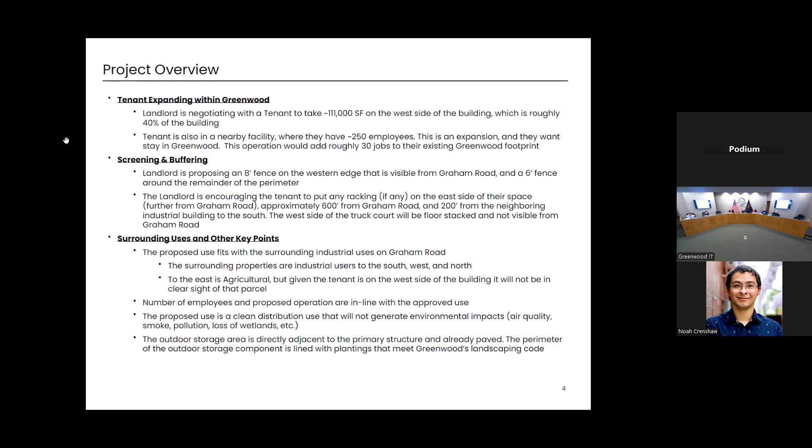And then I think we already talked about the screening and buffering. Any racking they have, we're proposing we'll put on the east side of the truck court, so further from Graham Road, more in the middle of our building. I think it fits with the industrial use along Graham Road.

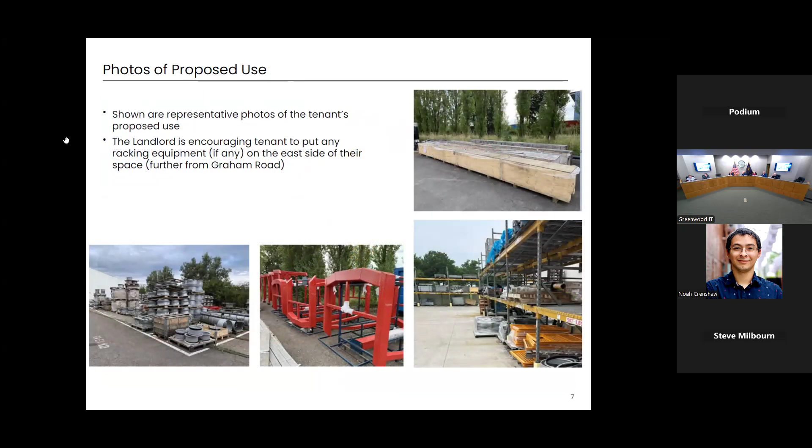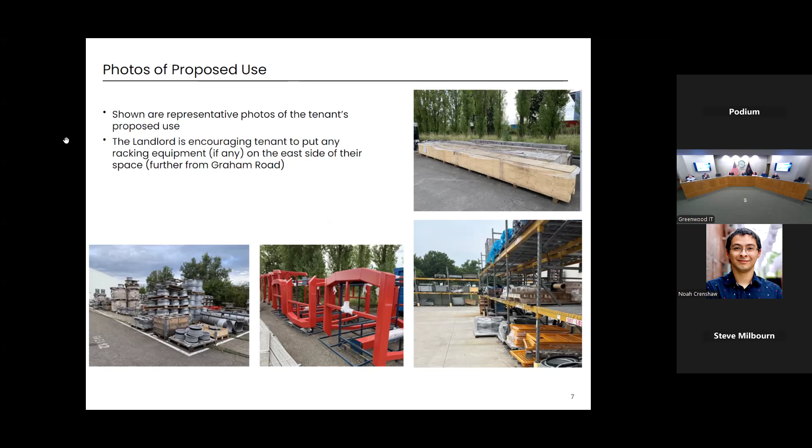Staff does have a few concerns with the proposal. It is not meeting one of our requirements to be located in the rear yard - it is located in the side yard, actually closer to the front of the building. We also questioned the screening material, showing chain link with slats, which would not be permitted for the screening of outdoor storage.

Lastly, I did want to mention - this was not in our staff report, but we do have some concerns. Exhibit B noted that there are designated fire lanes, and there should not be parking in the fire lane, per section 6-91. So if you are to approve this, make sure that is addressed. I think it conflicts with our fire lane access - the fencing they're looking to install, as well as the location and parking of vehicles, may interfere with that. I know it wasn't in our staff report, so I'll let you respond if you're willing, but that was a third concern we had. For those three reasons, we did provide an unfavorable recommendation.

Sure, so the concern is - if you go back to the site plan, one of the first ones. See in the parking lot, those hash marks, those lanes - on the bottom where it says outdoor storage zone? Yeah, those are all three fire lanes, and the outdoor storage goes directly over a fire lane. The Greenwood ordinance precludes any blocking, parking, stopping, or standing of any personal property, or any other means of obstructing fire lanes on private and public property, shall be prohibited at all times. Also ordinance 6-135 for new construction indicates that for commercial property, you can't block fire access in such a manner to obstruct free passage of fire lanes. So the concern is your fencing obstructs that access to those fire lanes.

So are you talking about the hashed area, sort of in the middle? Yeah, see where the parking slots are - in those parking spaces there's a hash mark. And if you look at exhibit E, it identifies those more closely. So could we update this plan to show that we won't store anything in that one specific slotted spot?

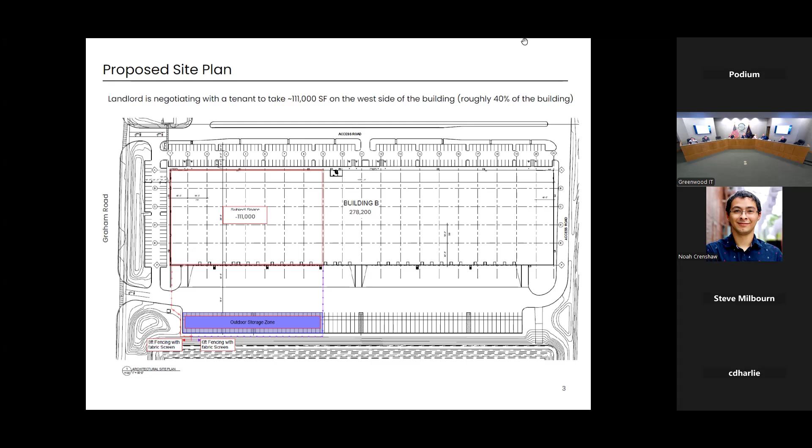I saw a picture of the chain link, so I get the chain link because you don't want to see through it. They had screening to go on top of the chain link that would make it opaque, which I assume is still not what was listed in the code adoptions. It's difficult to see in the photo. I do know chain link slatting is not allowed, even when it's opaque.

I will say, going by exhibit F, that is not the case, so that's okay, as long as you don't come right up to it. It looks like it might be a fabric screen where you could potentially see through it.

Right. I guess I'm trying to think what would be longer-term nicer - with a cedar fence, wooden fences are a lot of maintenance in many ways versus a more metal fence.

Did he not say that this is provided by the owners of the building and that they already have that on another part of the property? That's something that's already existing, the cedar - no, I get it, okay.

I was just asking because I was trying to clarify the opaque request, since it's in a different spot. From a maintenance perspective, I would agree with you - I think this is long-term better. We do have a cedar fence requirement on the north side of our building.

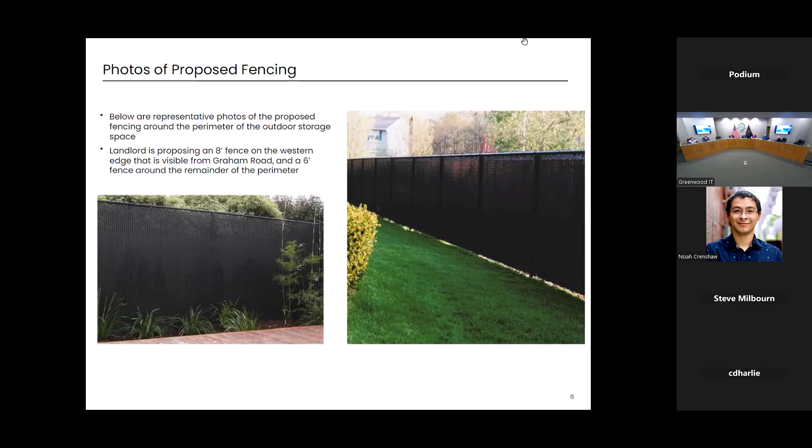I'll go back to the aerial page. When we initially did construction, you'll see the northern building here. On the north side of that, we do have a wooden fence on top of the berm - we tried to hide our truck court from the existing neighbor to the north as best we could, so we do have some wooden fence around.

What about the southern side - is there no fencing now on the south, this proposed area? No, there's not. There's a berm that goes around the pond. The tenant to the south is industrial.

All right, any other questions?

I will take a motion to admit all the evidence in the record. Chairman, I move that we admit all the evidence presented in regard to this matter, including the notices, receipts, maps, photographs, written documents, petitioner's application and attachments, petitioner's detailed statement of reasons, the staff report prepared by the planning department, certified copies of the Unified Development Ordinance and Comprehensive Plan, testimony of the petitioner, city planning staff, and any remonstrators, and all other exhibits presented, be they oral or written, for consideration by this board in regard to this petition, and to include the testimony of those present this evening. Motion by Mr. Peters, second by Mr. Moll. All those in favor, raise a hand. All opposed, same sign. That motion carries 4-0.

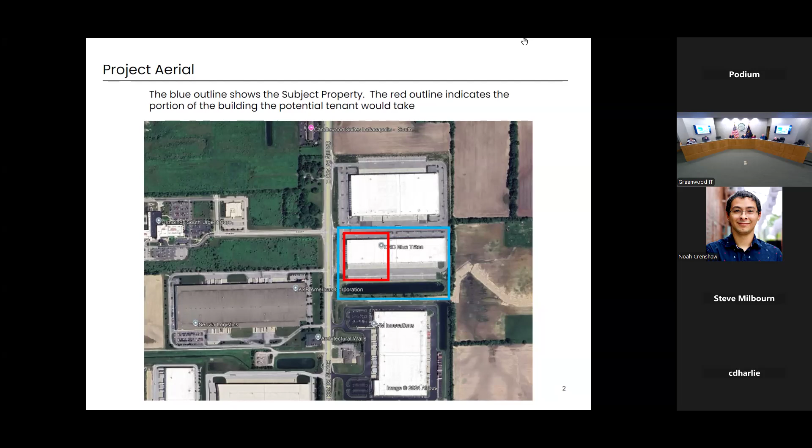That reflects the changes the petitioner testified to. Say that one more time. That a new site plan be submitted that reflects the petitioner's testimony on his changes. Site plan submitted and approved.

Do you guys actually approve site plans, procedurally? What happens if I submit a site plan? Yeah, we do approve site plans. With this being impervious surface already, with just really a fence going up, it won't require any land alteration permit, but it could. We would make sure that it meets our standards. Some things we have standards for, they don't necessarily need a permit to do. If you are a resident and you put up a fence that's 10 feet tall, you get a zoning violation—you didn't need a permit for the fence, but we have a standard that says our fences in residential areas are 6 feet tall.

So we would still review the changes, and you could commit them to doing the site plan of some type. It would just be a very minimal review that we would do. Well, that's the condition of adding it to the site plan, but I'm not saying—yeah, we have site plans, we could approve them. I'm just not saying submitted and approved, because there's not an approval part. We have the authority from Plan Commission to approve secondary plats and site plans. So yes, we could approve the site plan if they were required to do one.

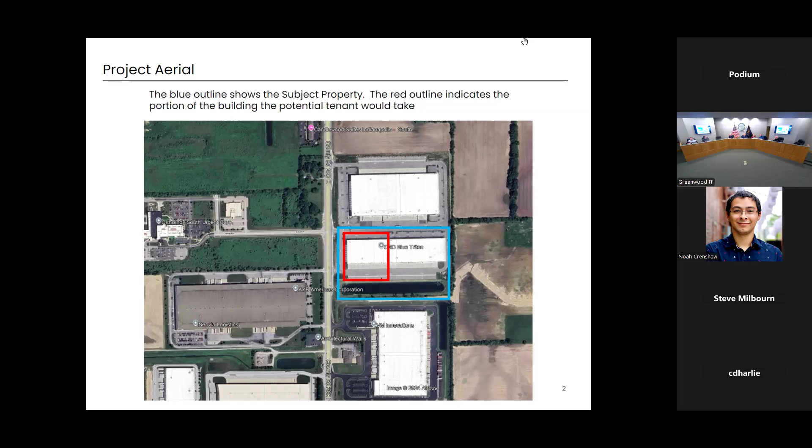Conditions can stay with submitted. I'm not gonna go that far. Okay. So it was: new site plan be submitted that matches the petitioner's testimony and changes, just so that it's out there for everyone. So the motion by Mr. King with the three conditions, second by Mr. Mole, to approve. All those in favor, raise a hand. All opposed, same sign. That motion carries 4-0.

I'll take a motion to direct Corporation Counsel to adopt the findings of fact. Chairman, having considered statutory criteria, I move that we direct the Corporation Counsel's Office to draft written findings of fact regarding our decision on the variance request presented in variance petition number BZA 2024-043. Said findings shall specifically incorporate the staff report and the evidence submitted to the record for consideration and adoption by the Board of Zoning Appeals as our final decision and final action regarding the petition at our next meeting. Motion by Mr. Mole, second by Mrs. Peters. All those in favor, raise a hand. All opposed, same sign. That motion carries 4-0.

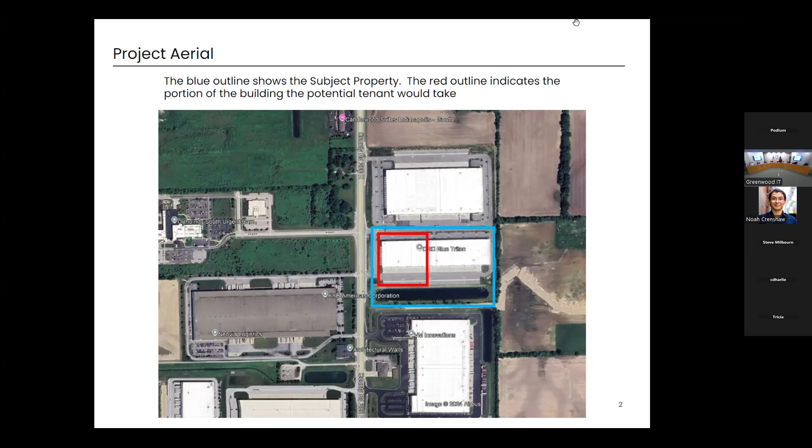Again, we will need to work with staff and the fire department to get all the conditions met, and then once that is done, we're good to proceed. Awesome, appreciate it. All right, BZA 2024-044, 2340 Indus Place.

Petitioner is Emily Martin on behalf of Endress+Hauser, requesting relief from two sections of the Unified Development Ordinance. Number one, to waive the requirement that any expansion over 20% shall require the entire building to come into compliance. And number two, to have a loading area in the front yard.

Is everything in order? All notices are in order and in our files. Those were pretty good. All those that are going to present for or against, or want to speak to this, please stand and be sworn in by our secretary at this time. Do you swear this testimony is true to the best of your knowledge? Yes, sir. Oh, thank you.

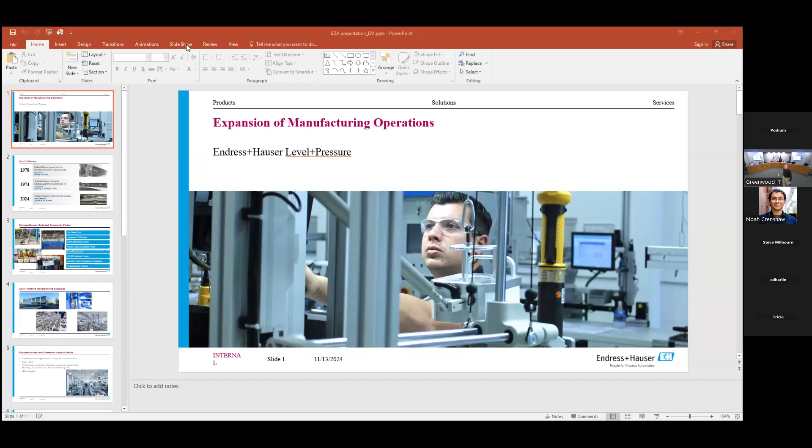Emily Martin, on behalf of Endress+Hauser Level and Pressure. My address is 6820 West 150 North, Bargersville, 46106.

What are we trying to do? I'm going to provide just a brief overview of the project, and then Nick Davis will go into the details of the variance request.

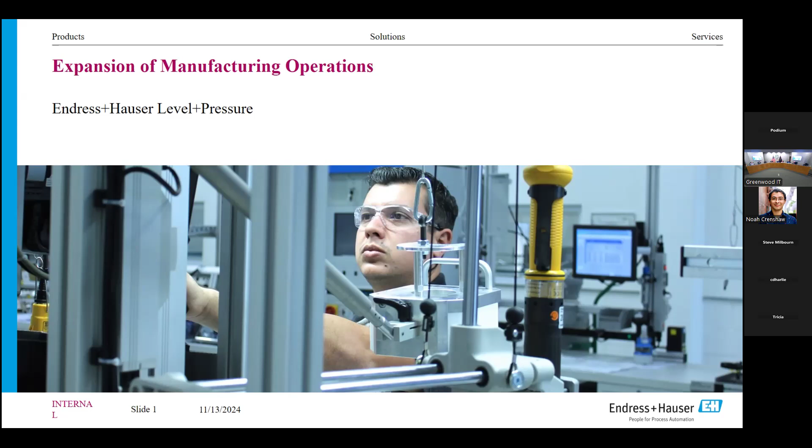So just a little bit of history. Endress+Hauser had sort of humble beginnings in Massachusetts, but selected Greenwood as the headquarters in the mid-70s because of its central location. Since then, the Greenwood campus has really grown and we now have around 500 employees.

We believe that we are a valuable member of the community, and we partner with a lot of organizations in terms of STEM involvement and philanthropic activities.

The Level and Pressure facility is one of 3 manufacturing facilities at the Endress+Hauser Greenwood campus, and we believe that we are a center of manufacturing excellence.

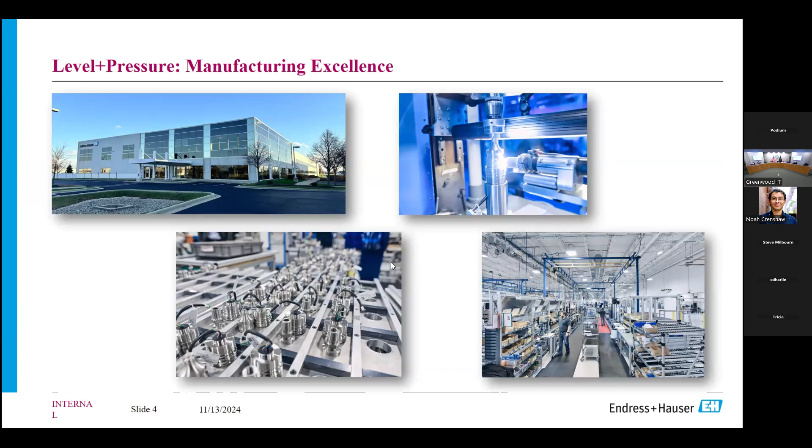Our current building is 120,000 square feet, light industrial and offices that support that industrial area. It was built in 2012 based on the standards that were in place at that time. We currently have about 150 employees, and when the building was constructed in 2012, it was LEED certified.

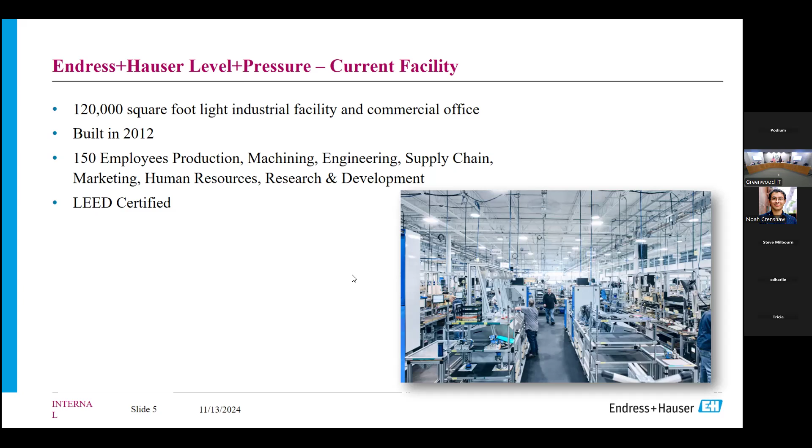The current project would be the addition of 40,000 square feet of additional manufacturing space added to the south of the existing building. Additionally, we plan to renovate 5,000 square feet inside the building, providing additional office space. All of this would allow us to relocate our apprentice program, which is part of our STEM workforce development. It's currently on campus, but this would allow us to relocate to a larger, more technologically advanced area.

The property impacted by this project is 2 parcels, both currently owned by Endress+Hauser. The primary parcel is in the center of the left picture, directly south of the building, and that goes all the way down to Pushville Road, at the bottom of the screen. The picture on the right side is just another aerial view.

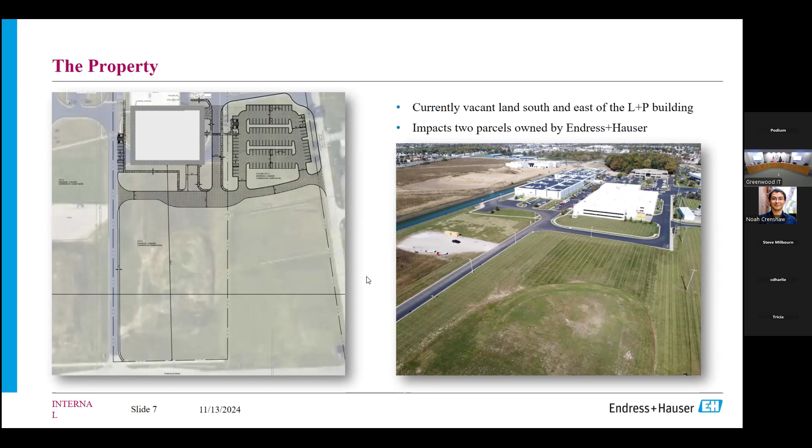The expanded area, we do plan to continue with LEED certification and implement PV solar on the rooftop. The HVAC would utilize geothermal heat in terms of vertical wells to make sure that the heating and cooling is efficient. Additionally, we have solar tubes in the roof, which allow streams of daylight into the production areas that otherwise would just be illuminated with standard lighting.

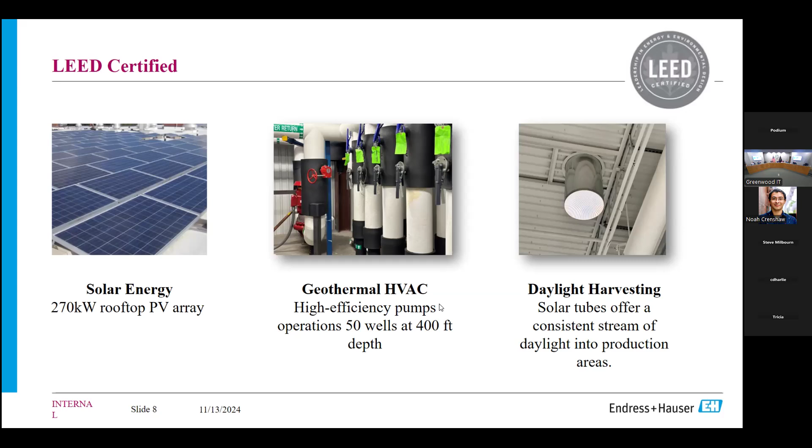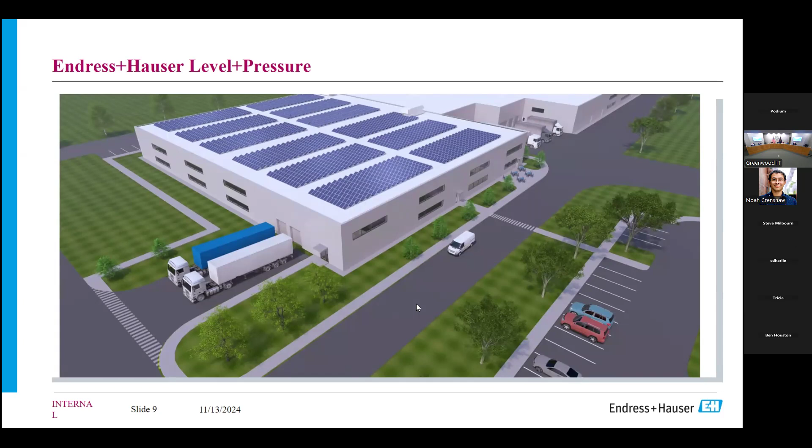So the details that Nick will go into are the 2 variances we are requesting. The first is related to the loading dock, which we would like to place on the south side of the building. This is the rear of the building, but it faces Pushville Road. This placement of the docks on the south side would allow us to optimize the production layout inside the building and maintain a very clear front entrance, which is actually on the north side, in the center of the E+H campus.

The second variance request is related to bringing the rest of the building into compliance. As I mentioned, it was built in 2012, and we believe the current front, shown in the picture, does meet some of the standards, including some of the glazing requirements. The financial investment that would be required, we would prefer to invest into growing our business and adding technology and innovation, but we are open to considering additional landscaping or painting of precast concrete, if that is more favorable to the board.

So at this time, I'll turn it over to Nick.